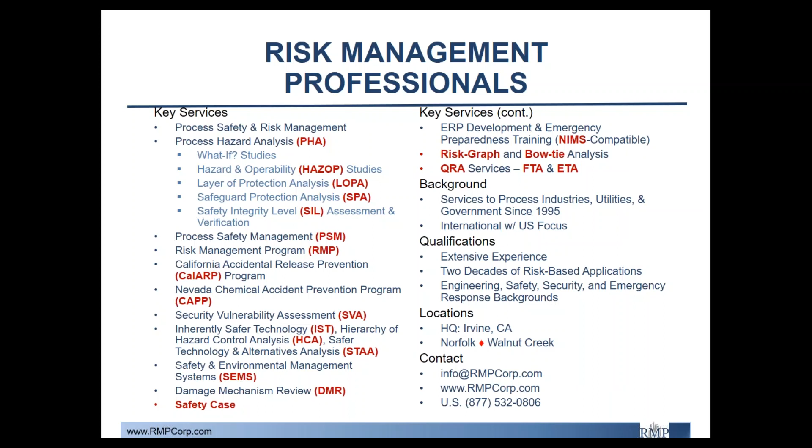Okay, so a quick summary of what we'll be covering today. We'll be covering three main topics. First, we'll get into exactly what the General Duty Clause states. We'll get into the key phrases and the specific language that's used by the EPA and OSHA. We'll break down the key phrases from these documents to help you understand exactly how it applies to you and what you can do to comply, and also briefly talk about the penalties that come up in case of noncompliance.

Okay, so I'm going to quickly go over the exact verbiage from the EPA and OSHA. So from the Clean Air Act, Section 112, it states that the owners and operators of stationary sources producing, processing, handling, or storing such substances have a general duty to identify hazards which may result from such releases using appropriate hazard assessment techniques, to design and maintain a safe facility, taking such steps as are necessary to prevent releases and to minimize the consequences of accidental releases which do occur.

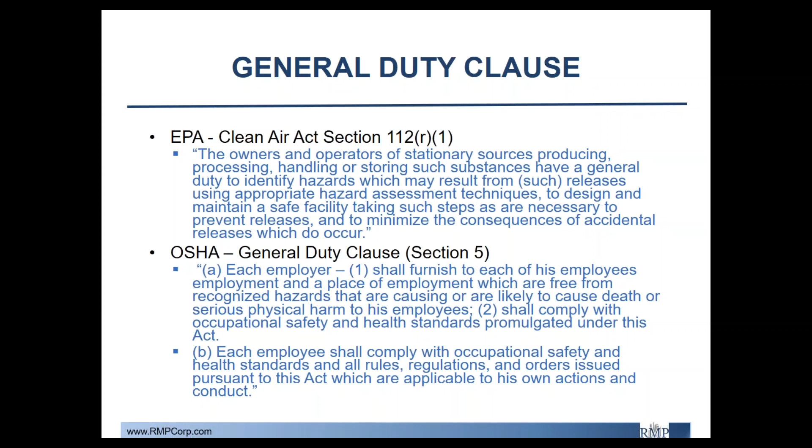And from OSHA's General Duty Clause, Section 5, each employer shall, 1, furnish to each of his employees employment and a place of employment which are free from recognized hazards that are causing or are likely to cause death or serious physical harm to his employees, and 2, shall comply with the occupational safety and health standards promulgated under this Act. And secondly, each employee shall comply with the occupational safety and health standards and all rules, regulations, and orders issued pursuant to this Act which are applicable to his own actions and conduct.

So what this in general means, there's a separate quote that's pulled from a separate section of the EPA. All it states is that facilities have a general duty in the same manner and to the same extent as Section 654, Title 29 of the United States Code, which means that all owners and operators must comply with the General Duty Clause in the same manner, and to the same extent employers must comply with the Occupational Safety and Health Act as administered by OSHA. So basically, every facility with chemicals listed by the EPA and OSHA should be looking at their compliance.

Okay, so what does this mean? All those fancy words basically just mean that you're likely to get cited by the EPA and OSHA, regardless of whether or not you follow the RMP and PSM applicability. And you can apply to alternative program levels if more information is needed. And if you do get inspected, the citation is at the discretion of the inspector, meaning that if he feels that safe practices aren't being observed, then you're likely to get fined. And along the same lines, if there's a facility that has been regularly having some accidents, then it's more likely to be inspected and cited.

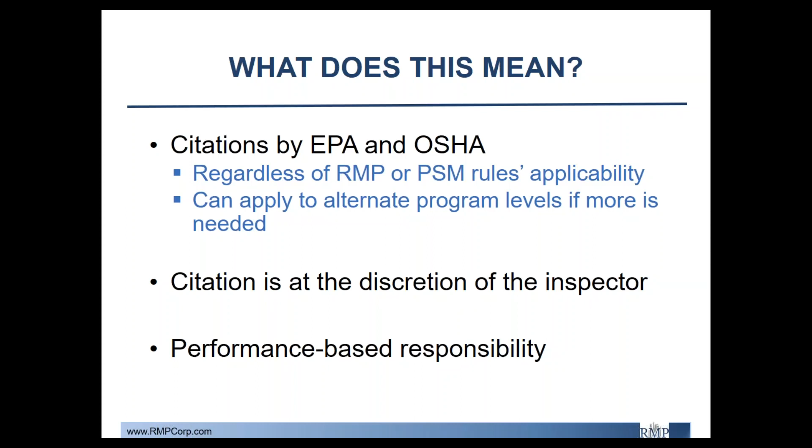So to go over the exact key phrases that are important from the quote that I mentioned earlier, for the EPA, the three things to consider are identifying hazards, designing and maintaining a safe facility, and minimizing consequences in the event that they occur. And from OSHA, all you have to really worry about is to be concerned with employee safety. So I'll get into that right away.

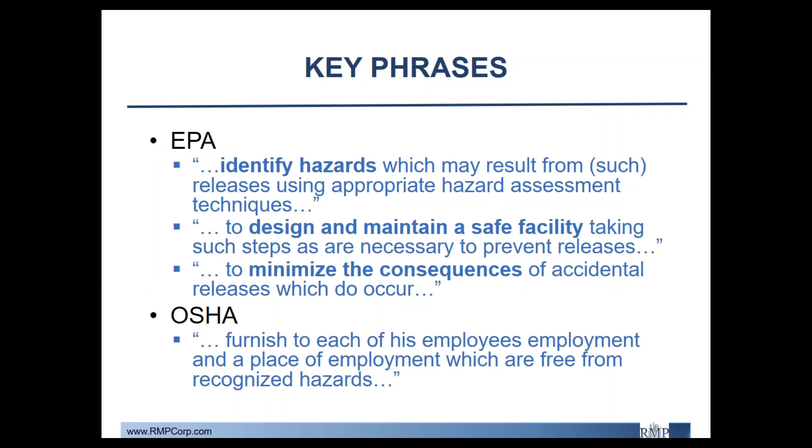Firstly, to identify hazards, EPA supplies specific questions that they look for when they do these assessments. For the guidance questions to identify hazards, they look to see if the PHA has been conducted by the facility, and specifically, is the PHA complete, accurate, and correct? Has it identified intrinsic hazards? Has it identified potential releases? And has it identified potential impacts to the community and environment? And also, they check to see if the facility is using proper hazard assessment techniques.

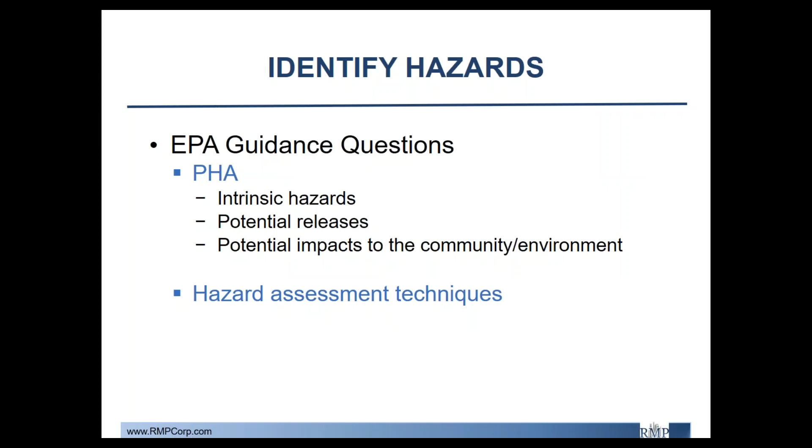Now, the solutions that the EPA states as the best way to address these issues is to obviously conduct a PHA or hazard review. You might want to look into considering the what-if analysis or a HAZOP study to look at the hazards that come with the process. And when you do the hazard assessment, make sure the worst case and alternative case scenarios are properly done. And if you're in California, make sure you take into account the seismic assessment.

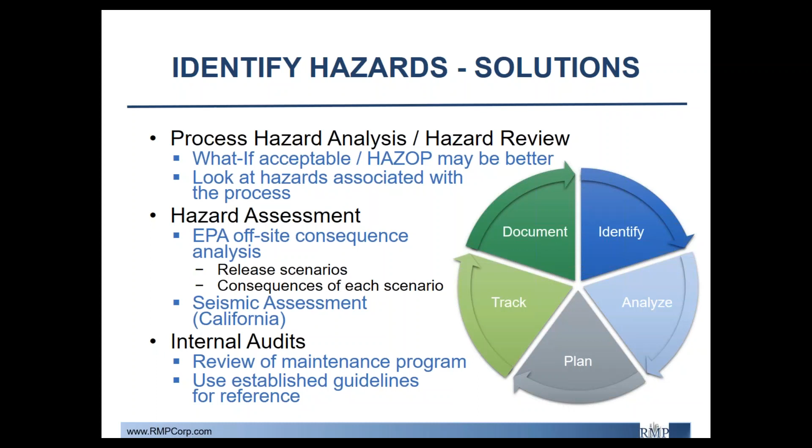And lastly, you can do internal audits to review maintenance programs and use established guidelines for reference. It's always best to avoid fix-on-failure practices, and you can determine if that's what's going on if you do an internal audit.

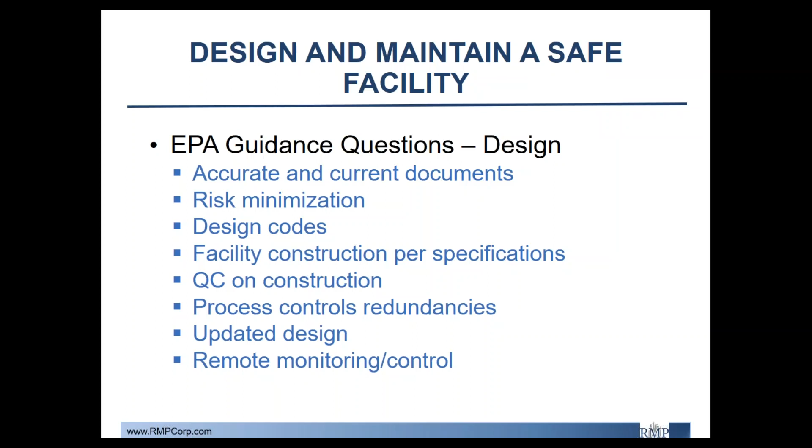Secondly, designing and maintaining a safe facility. The EPA questions that they look for are: are the design documents correct, accurate, and current? Does the design actually minimize the risks that are identified? Are the design codes identified and appropriate? Was the facility constructed or modified according to design specifications? Is there quality control on construction materials? Do critical process controls have redundant systems? Has the design been updated to current codes and standards? And are there capabilities for more remote monitoring or remote control during any upsets?

So to address these issues, EPA recommends that you use the newest standards when possible. There are often some subtle changes in between versions that might be overlooked. You should also use applicable standards. Obviously, you want to use the most relevant standards that apply, and make sure you consider any local implications that might come into play.

For the construction, you want to make sure a qualified contractor is brought onto your facility to do any installations or any building. Make sure you have a detailed quality control program, and make sure you're thinking about sustainability and longevity. It'd be pointless to do anything without having those things in mind. And lastly, make sure that the remote capabilities are accessible if needed, as I mentioned before.

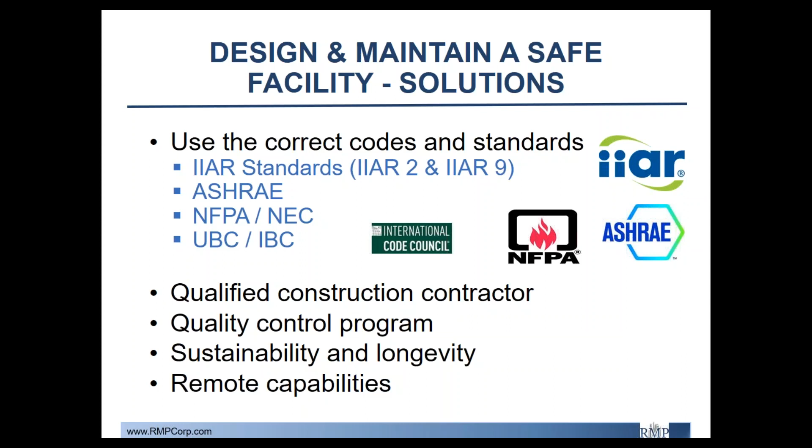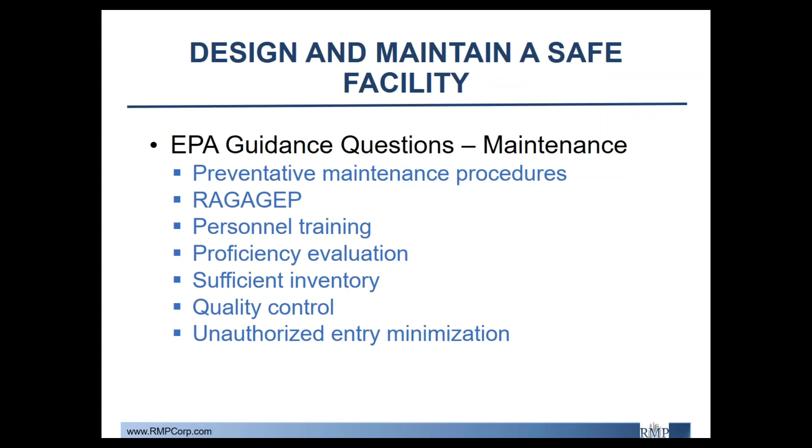Okay, so the maintenance aspect of designing and maintaining a safe facility, the main questions the EPA asks are about the preventative maintenance procedures for mechanical integrity. Do procedures and schedules follow recognized and generally accepted good engineering practices, or RAGAGEP? Are maintenance personnel trained on the hazards of the process and maintenance procedures? Does training include understanding and proficiency evaluation? Are there sufficient supplies in the inventory? Is quality control for spare parts sufficient? And how does the facility minimize the possibility of an unauthorized entry?

So to address these issues, the EPA recommends that the preventative maintenance procedures should originate from manufacturers, industry best practices, or corporate practice if it's more conservative. And they always recommend to include RAGAGEP in your evaluation. They recommend that training should be up to date and has to be in the language of the user, so the employees need to be able to fully understand it. The inventory of spare parts should be adequate and readily accessible in the event that they're needed. And the quality control for the spare parts should include how they're stored and ensure the facility is secure.

So I'm going to pass it off to Stephanie now. She'll go over a few more parts and wrap things up.

I'm just going to check. Jasmine, are we coming in okay? Okay. All right. Good morning.

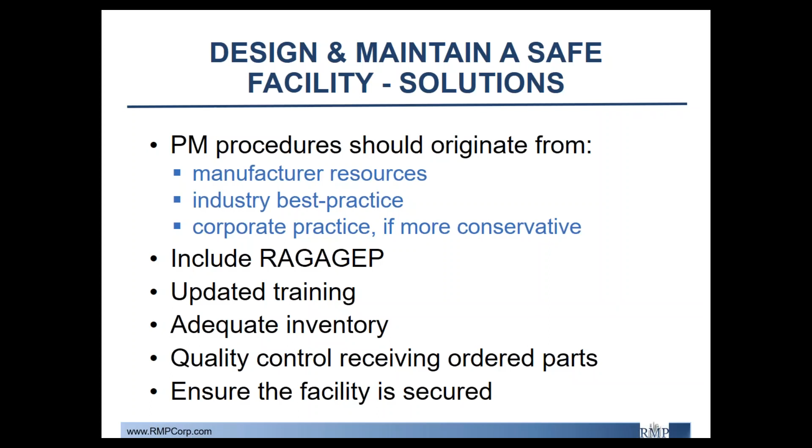I'm going to go ahead and pick up where DJ left off and continue with the guidance questions for operations under designing and maintaining a safe facility. Basically, these apply to SOPs primarily, although they can apply to other areas, say for maintenance or whatnot. We'll focus more on addressing the SOPs.

The EPA, when they're looking at these general duty clause audits, will be asking whether or not there's an SOP for each process. It's really important to make sure that all those required SOPs for each process you have, or if necessary, different pieces of equipment, are addressed. And are they current? Going back to those annual cycles that are required in the program, different program levels, for instance, program level 1 may not have that requirement. However, you may still want to have SOPs and follow that guideline to meet the general duty clause standards.

Do the SOPs cover each phase of the process? Are they clear, concise, correct, and understandable? Do they identify operating limits such as temperature, pressure, flow rate, volumes, etc.? And do those limits agree as identified in the PHA or any other kind of studies or documentation associated with the process? Is the process equipment clearly marked, labeled, etc., according to any established standards?

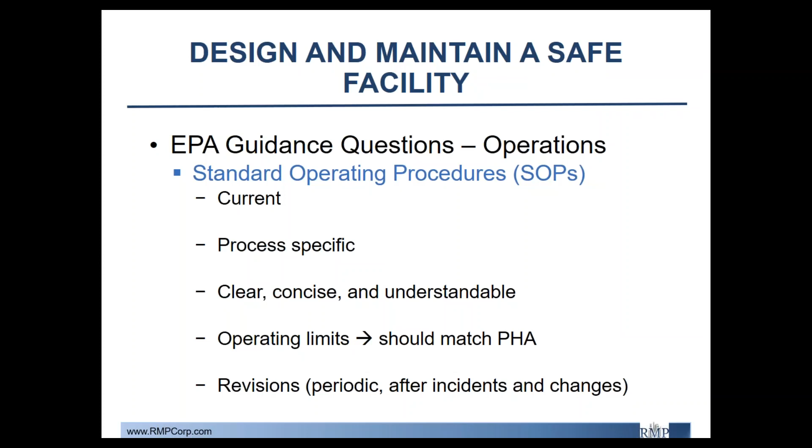So some solution to this, again, we kind of talked about it in the previous slide, to maintain proper SOPs and training within your facility. Again, the general duty clause is regardless of program level. So if this is applicable to you, even as a program level 1 facility or a facility under threshold limits, this is important information to take into account, as you may still need this, especially if someone's coming over to audit you for general duty clause.

Scheduling annual reviews of SOPs and ensuring that someone is responsible to do that and sign off on it. It could be that an operator is responsible for doing it, but a manager is responsible for overseeing that it gets done. It could be that a head maintenance operator is responsible for getting the entire thing done and signing off on it. It's really up to each facility for what kind of responsibilities they want to assign, but it does need to get done.

Also, auditing SOPs for accuracy, completeness, and understandability. It's really important to make sure that all your SOPs are easy to follow. I usually use the rule, if someone can't walk into your facility fresh and follow a procedure, it's not good enough. Now, obviously, you never want to let anyone do that, but that's the kind of consistency and clarity you want in your procedures.

Also, sometimes it helps, sometimes it doesn't, but you could consider adding in pictures of the control panels or where things are located to make it more clear. Some facilities don't find this helpful, some do, but it is something that you can always add in if it's useful. Nomenclature should always match. Tag numbers, P&IDs, any references to equipment, all the tag numbers and labels should match consistently across the board. Anything that doesn't match or isn't consistent is technically considered non-compliance.

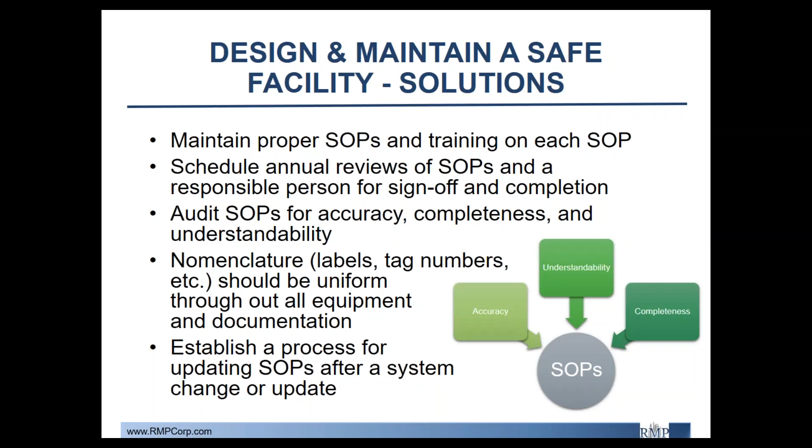Also establishing a process for updating SOPs, having a regular schedule. I've been at facilities where they audit everything and update everything in January. I've been at facilities that rotate quarterly for which SOPs they address and do training with the updates. So there's a lot of different ways to do this and to stay compliant, and it's really finding that mechanism that works for your facility.

Also, under designing and maintaining a safe facility is training in the EPA guidance. So the EPA is looking at questions such as if the employees are trained and tested for competence in training. This can be addressed with either observation, oral quiz, written quiz, and a sign-in sheet. And so there's a number of different methods depending on what will work for your operators. Also, they ask if training is adequate. If employees are trained on the hazards of the process and the consequences of deviation, really understanding what the hazards are at the facility and what happens when something isn't going according to plan.

Also, the frequency of training is something that the EPA is looking at, and whether or not it may need to be more frequent than 3 years as required in the RMP and OSHA requirements. Are instructions given in a clear manner and understandable? That also includes understanding in the language of the user or the operator. Are employees trained to recognize emergency situations, and are they authorized to take actions to prevent them or mitigate those hazards? And also, does training reflect any current operations?

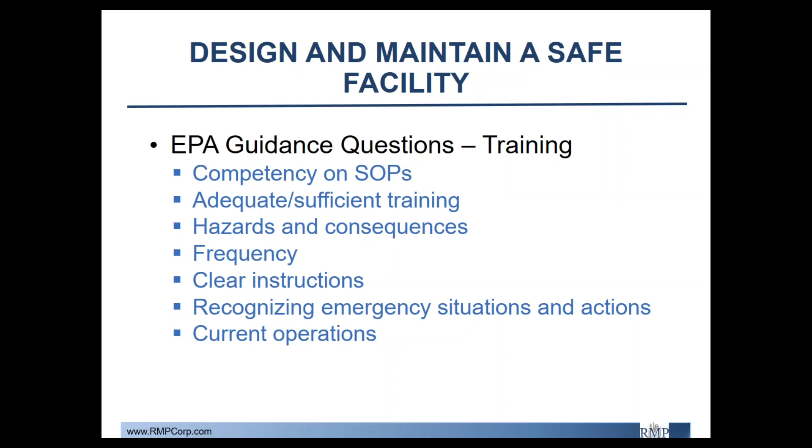In order to address all these, obviously training should be understood and retention should be tested in some manner. I mentioned oral exam, the written exam, sign-in sheets, even an observation of whether or not the person understood, so perhaps either a maintenance procedure or a training procedure. There are lots of methods in order to get this material across and make sure it's understood.

Also, operators and management should understand the hazards of the system. Management should understand it at least as much as the operators do. And in addition, the consequences of deviation are very important. What happens when something can go wrong? Refresher training, again, I mentioned the 3-year mark. I have a lot of facilities that do training much more frequently than every 3 years, and it's necessary more frequently than 3 years just to keep everyone refreshed and up to date.

And also knowing your emergency preparedness and procedures and having those coordinated, especially when you're talking about any kind of outside sources like the fire department, which we can talk about a little bit. The fire department also has their hand in this, or if you have a local hazmat team, and all that should be coordinated and trained on with drills, exercises, tabletop, perhaps full-scale drills where they get fully dressed or whatnot. So there's a lot to work with the training.

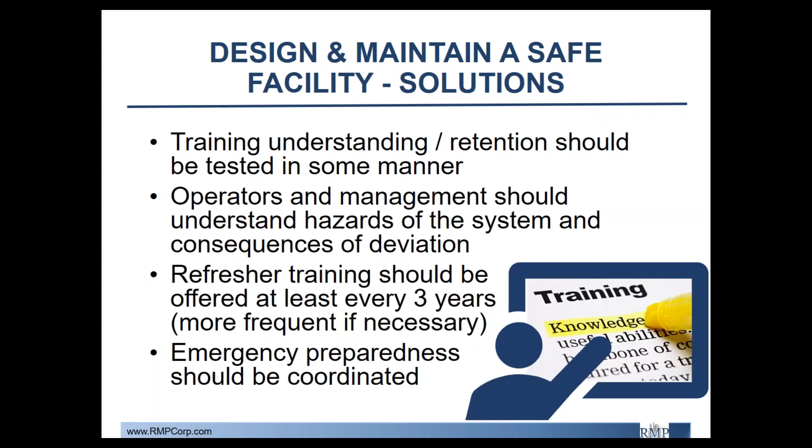And then we go to our last key topic, which is minimizing consequences. This, in the EPA guidance for the inspectors, is really intended to minimize consequences to the community, but also to those on site. So do the hazard assessments identify potential release scenarios and potential impacts, both to the community and to people on site? Does the emergency response plan respond based on release scenarios? So do you have trained people, or do you have procedures based on what kind of scenario you have?

Does the plan clearly identify responsibilities, functions, and contacts? Does the plan include coordination with local emergency responders? Again, talking to your local fire department or hazmat team. Are employees trained on emergency response actions? So not just those that may be responsible for preventing more of an emergency after it's happened, but also just generally speaking, do your employees know to stay out of the way and evacuate or whatever the procedure is? Are employees trained to recognize emergency situations, and is the plan revised as the process changes?

So again, hazard assessment and identification is really important here. Is there follow through on any recommendations from incident investigation, process hazard analysis, or just generally speaking if something's found to be deficient? And also, are the appropriate release scenarios used to address the hazard assessment and the modeling to properly address what could happen at the facility? Also, are there good safe practices, generally speaking, at the facility? Is that something that could be improved upon?